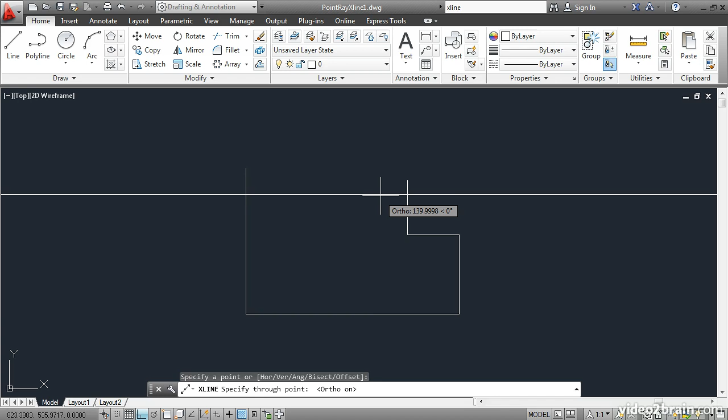I'll click a point right about here in between these two vertical lines. And as I move the cursor, you can see that I can rotate this Xline about the initial point that I clicked. I'd like this to be a horizontal line, so I'll use ortho. I'll move to the left or the right so that this goes horizontally, and then I'll click and press Enter to end the command. So right now this is an Xline, meaning it goes off to infinity in both directions.

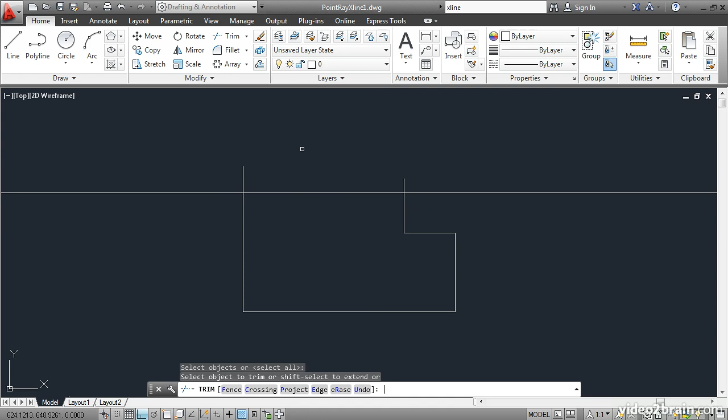I'll use the Trim tool here on the Modify panel, and on the command line it says Select Objects or Select All in angled brackets. I'd actually like to select all the objects in the drawing as potential cutting edges for the trim operation, so I'll press Enter to accept the default. And then I'll click the objects where I want to trim them. In this case, I'll click here, here, and here. I'll press Enter to finish the trim command.

So right now I trimmed away the Xline and actually turned it into a ray. Rays begin at a point and go off to infinity in one direction. I'll trim off this edge as well. Trim, Enter, click, Enter. Now we have a line object. So Xlines and rays are easily convertible into lines by trimming.

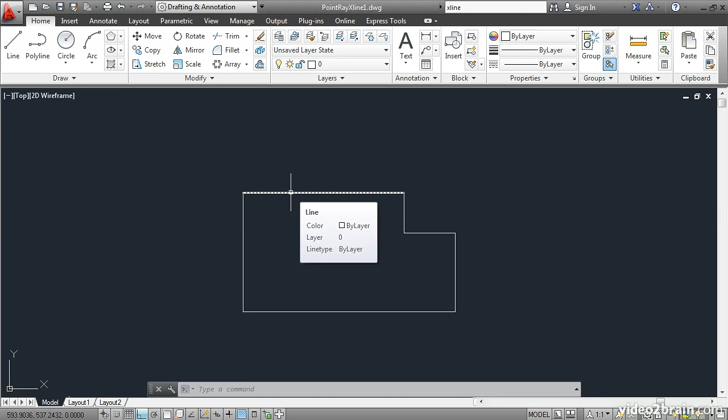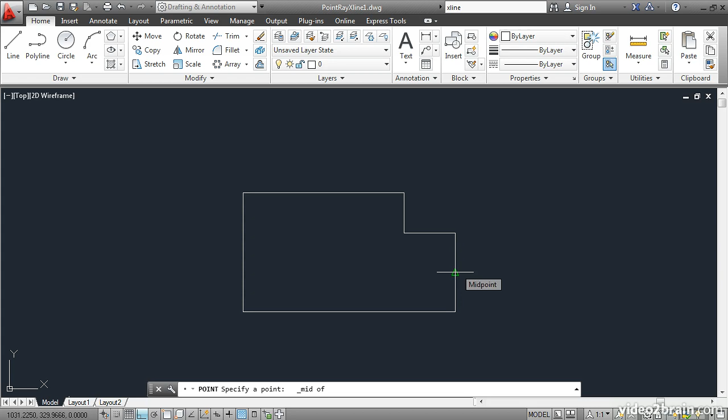The next thing I want to do is create a point object. So go up to the Draw panel, expand the slide-out, and click the Point tool. Snap that to the midpoint of this vertical line by holding down Shift, right-clicking, and choosing Midpoint from the context menu. Then click on the midpoint to create a point. Press Enter or Escape to end the command. We can't see the point at this moment.

Let's erase the line. Erase, select the line, and press Enter. There's the point, but it's very small. It's only 1 pixel in size. You can enlarge the point display by typing DDPTYPE. This is a very old command. DD means dialog box, and PTYPE means point type.

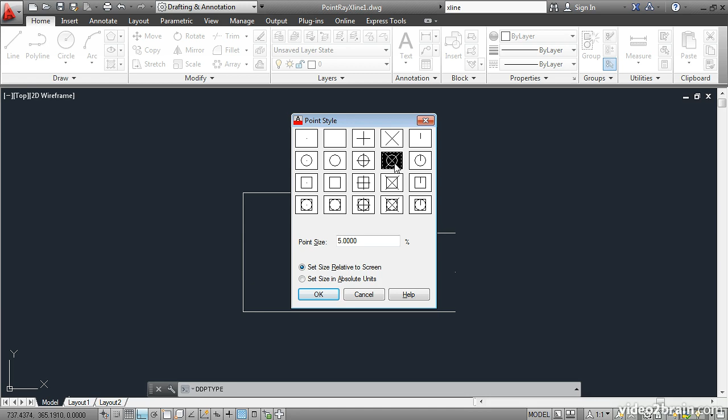So I'll press Enter, and we have a variety of point styles to choose from. I'll select this symbol and click OK. So now the point has a larger appearance, but it's still a point of null size. So now let me go ahead and draw an arc. I'll open the Arc flyout. I'll create an arc using the Center Start End method.

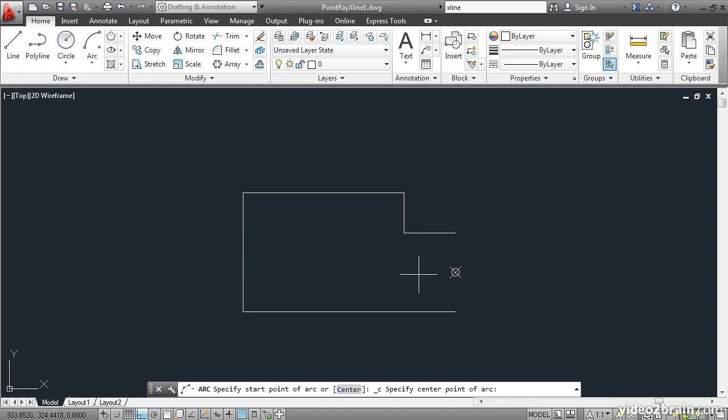And I'd like to snap the center to the point. To do this, you have to use a specialized object snap called Node. Shift right-click, choose Node, and then click on the point. Shift right-click and choose Endpoint, and click on this endpoint. And then Shift right-click and choose Endpoint again, and click right here to complete the arc.

Let's offset this existing arc some arbitrary distance inside. Use the Offset tool, which is located right here in the Modify panel. It says Specify Offset Distance. I'm going to do that not by typing in a number, but by clicking 2 points. I'll click approximately here without even bothering to snap anything, because I'm doing this arbitrarily. And then I'll move in here and click another point, about here. That sets the offset distance interactively.

Then it says Select Object to Offset. I'll select this arc. And then you can see that as I move the cursor in or out, I have the option to offset a new arc in either direction. In this case, I'd like it to be inside, so I'll click right here to generate a new concentric arc, and then I'll press Enter to exit the offset command.

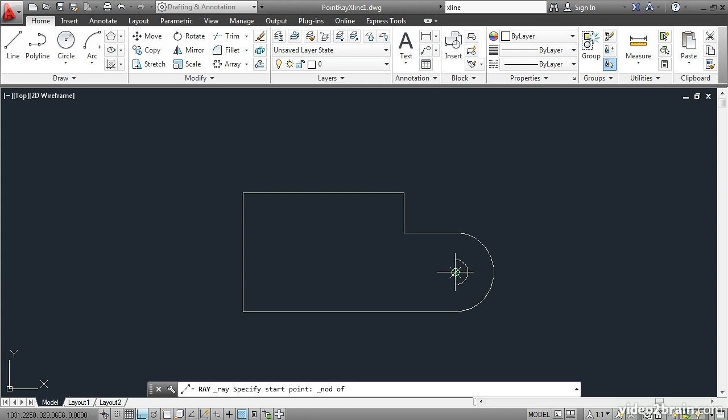Let's use the Ray tool here, and let's start the ray from the node associated with the point. So Shift right-click, Node, click on the point, and because ortho is on, I can draw this ray up vertically. I'll click a point and press Enter to draw in a ray. Now I'd like to array the ray.

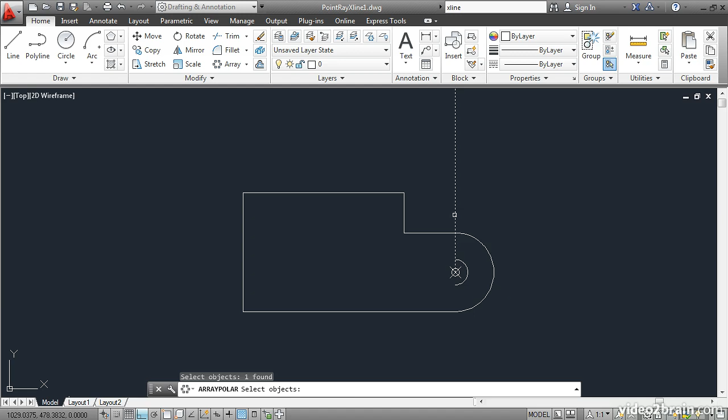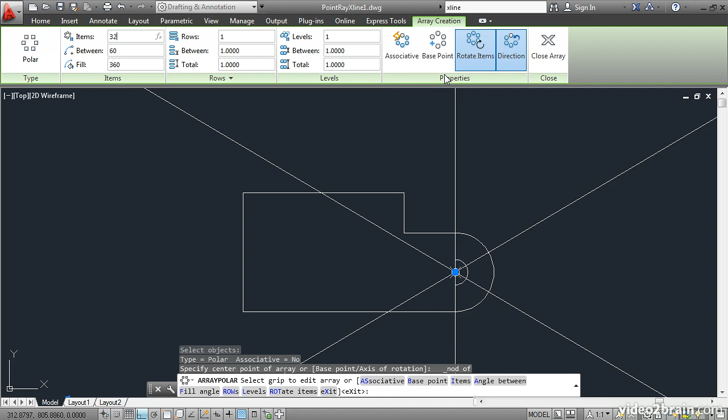I'll do that here. Open the flyout and choose Polar Array. Select the ray object, press Enter, and it says to specify the center point of the array. Well, that's the point object. Shift right-click and choose Node. Select the point's node, and then go up here and change the number of items to 32. Make sure Associative is not checked, and click Close Array. Now we have a series of rays going around a circle like this.

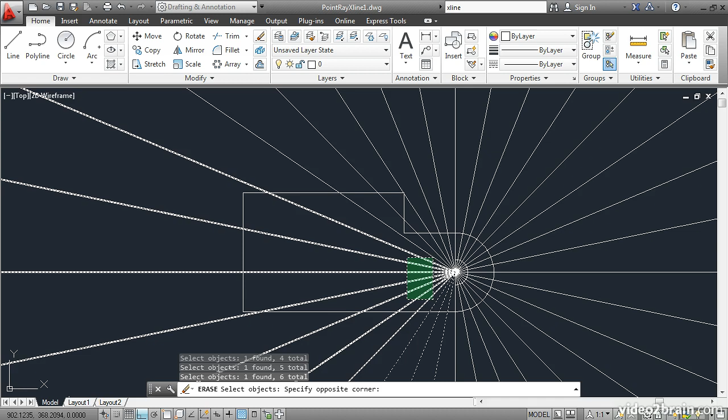Let's erase some of them. Erase all of these rays over here on the left side. I'll click down here and make a crossing window that crosses a series of these rays. It's a little bit quicker to select them in that way. Press Enter, and they're gone.

Now let's trim away these rays. I'll use Trim. I'll select the outer and inner arcs, and for this I need to zoom in by rotating the mouse wheel. I'll click here and press Enter. Then I just need to click on these rays to get rid of the portions which I want to trim away. And I can do that quicker by making a crossing window, like this.

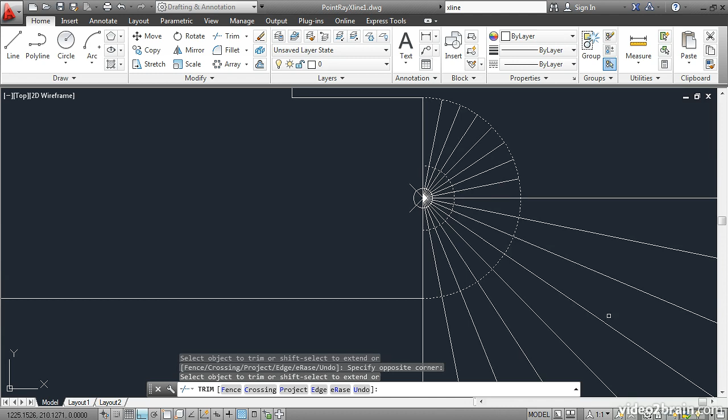And then inside here I want to do the same sort of thing, so I'll zoom in and then make a crossing window to get all of those and get rid of them. Press Enter, and you're done. Double-click the mouse wheel to zoom out. You have now learned how to use and style point objects, how to create and trim rays and Xlines, and have explored several editing tools in the process.